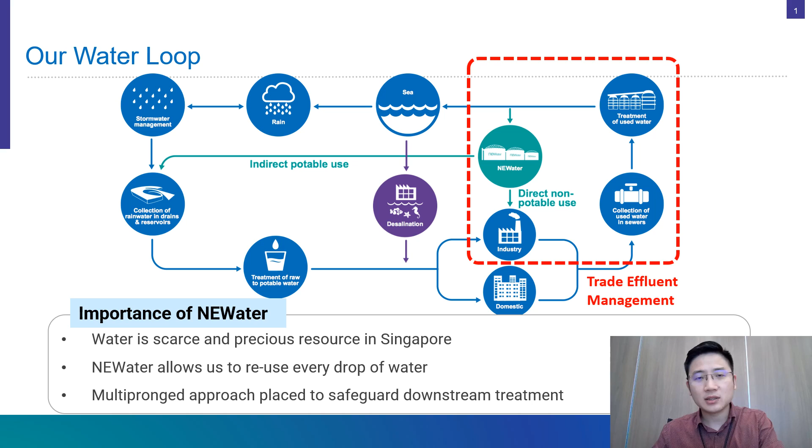Factories are required to comply with trade effluent discharge requirements, as discharge containing prohibited substances or excessive concentration of regulated substances affects the health and safety of our maintenance workers, as well as causing disruption to the downstream treatment processes at our water reclamation plant and NEWater factory.

Currently, for factories with higher risk of discharging prohibited substances or excessive concentration of regulated substances, such as those in the electroplating and chemical manufacturing industries, PUB will require them to install water quality monitoring instruments in their last inspection chambers. PUB officers also inspect these factories frequently to ensure compliance.

During this inspection, trade effluent samples may be collected for lab analysis and enforcement action may be taken if non-compliance is detected. Special operations are sometimes conducted in factories suspected of carrying out illegal discharge activities. During such operations, PUB monitors the trade effluent from the manholes outside these factories.

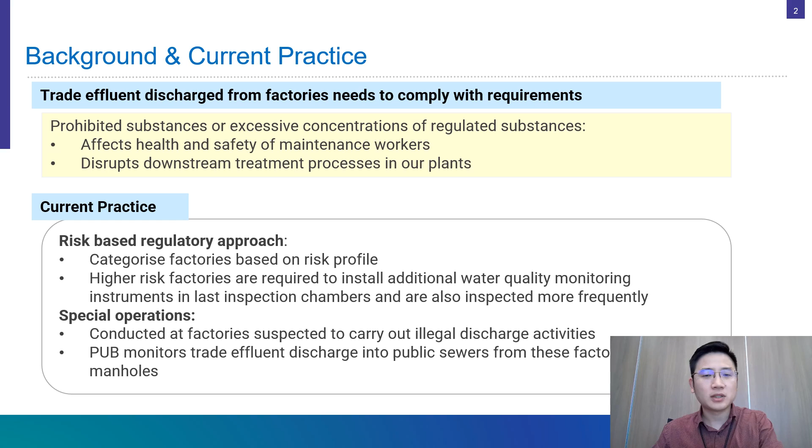PUB has an existing robotic crawler to deploy at public manholes to monitor suspected factories with sanitary drain lines connected to the public sewer system via top-saddle type connections. The crawler comes with a small collection tank with covers to contain the effluent sample. The operator will maneuver it under the sanitary connection of the suspected premises to collect the effluent samples.

For other types of lateral sanitary connections, where trade effluent enters the main sewer in other directions, the current robotic crawler is unable to collect a representative effluent sample, as its collection tank is designed to only collect effluent that is flowing vertically down.

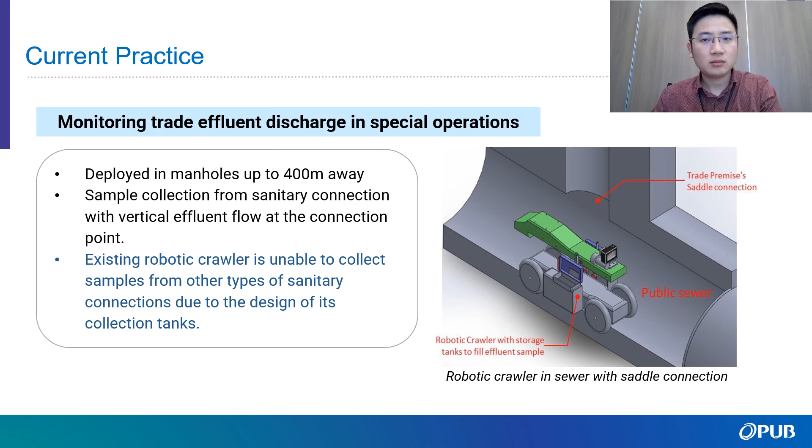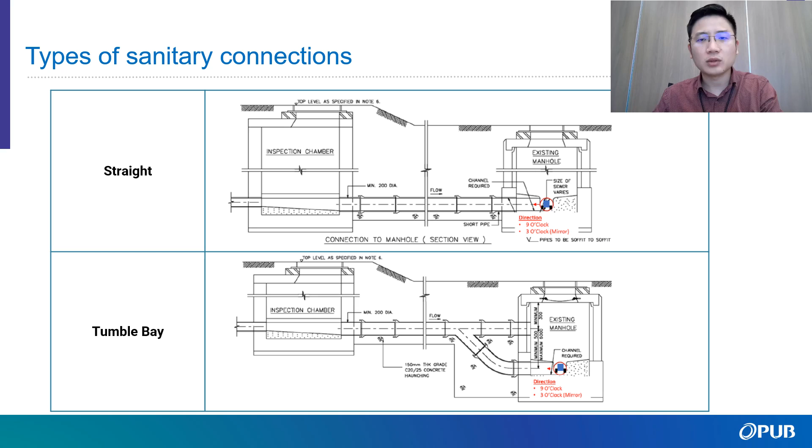This slide shows the different types of sanitary connections. Straight and tumble bay type sanitary connections connect to the main sewer at 3 and 9 o'clock directions, meaning either from the left or the right direction. So the existing crawler is unable to collect samples from these connections due to the design of its collection tanks.

Backdrop type sanitary connection is similar to the straight type connection at 3 or 9 o'clock direction. As for Y junction sanitary connection, it is angled at a 45-degree angle, so the existing robotic crawler is unable to collect representative effluent samples.

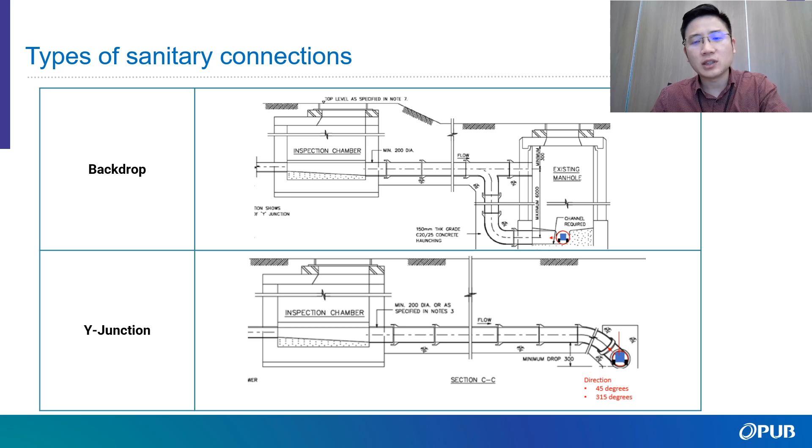The existing crawler can collect samples from saddle and raised connections where effluent is flowing vertically down.

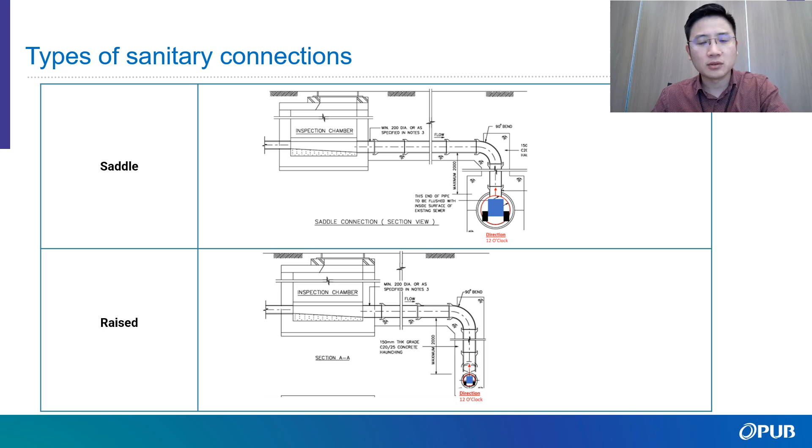We hope to find a robotic system that can be deployed in sewers to monitor and collect trade effluent discharge from the various types of sanitary connections. The robotic system shall be deployed without the need for man entry into sewers and be able to be remotely controlled by operators from the ground.

It should also be able to maneuver in different sewer environments and conditions, such as negotiating bends in the sewer pipes and soft sediments. It should also carry cameras to visually inspect the sewage pipe, sanitary connection, and sample collection process, as well as a gas meter to monitor for hazardous gas at source.

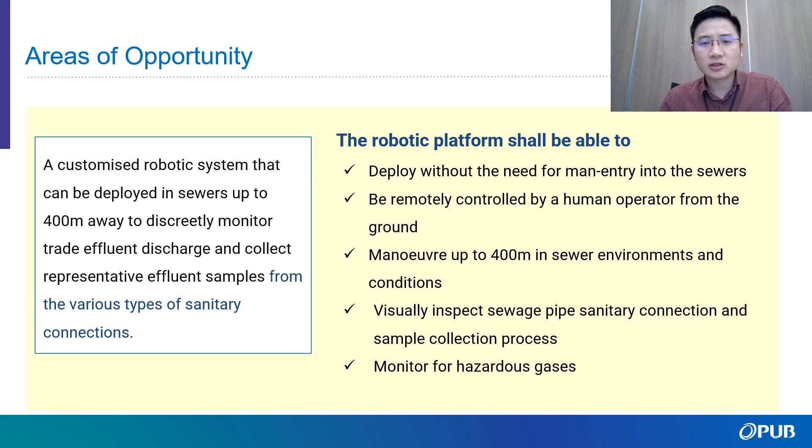The operational requirements of the robotic crawler: it shall have suitable traction to maneuver in sewers with water level up to half bore and pipe invert filled with soft sediments. It should record and display distance traversed with an onboard odometer.

It needs cameras to observe visually and record evidence, and to measure hazardous gas at source, such as volatile organic compound, hydrogen sulfide, carbon monoxide, oxygen, and lower explosive limit. It should also have sufficient cable length and minimization of drag.

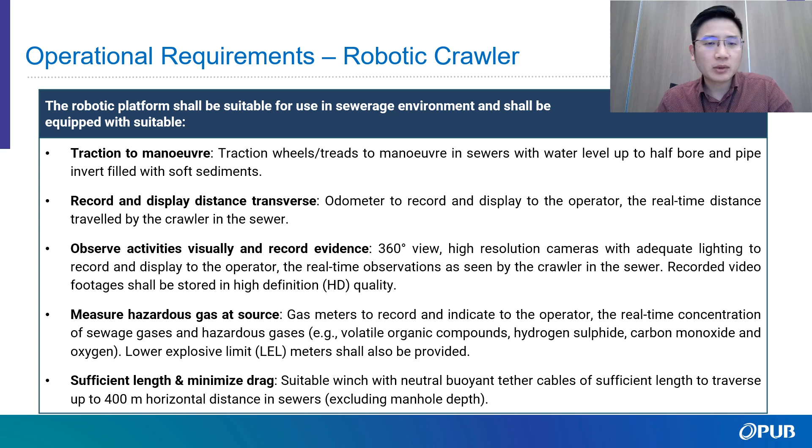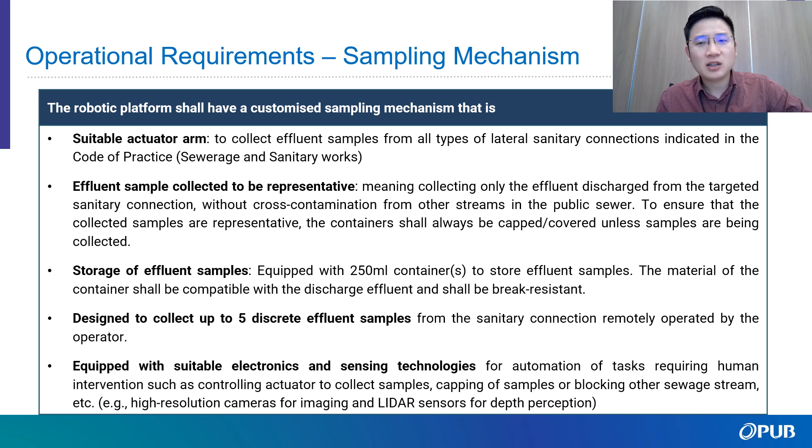That means it cannot be contaminated from other waste streams present in the public sewer, and bottles are kept sealed after collection. The sampling mechanism should be equipped with 250 ml containers to contain the effluent samples, with material compatible with the discharge effluent, and designed to collect up to 5 discrete samples remotely. It should also preferably have suitable electronics and sensing technologies for automation of tasks requiring human intervention.

The robot should be designed for sewers with diameters ranging from 300 to 600 mm and manhole depth of up to 10 meters. Do take note that the standard sewage manhole in Singapore is 600 by 600 mm opening to fit the robot through. Other design requirements for the robot to function in hazardous environments have to comply with relevant standards.

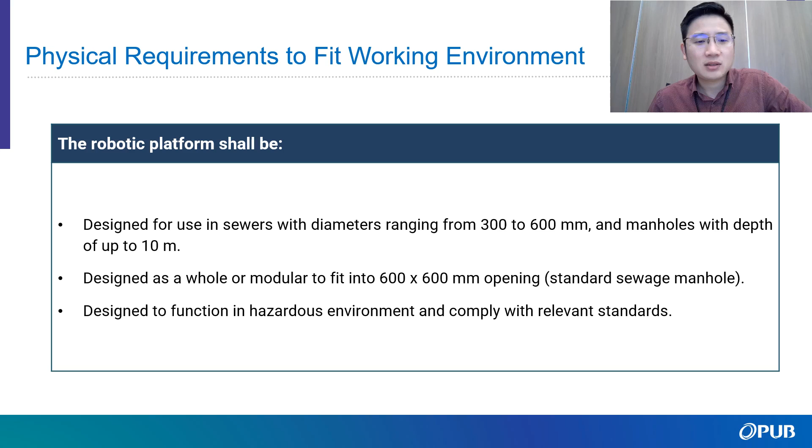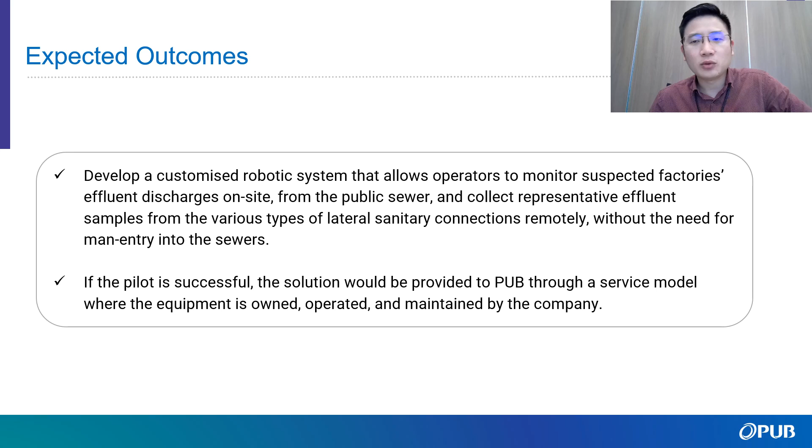We expect the customized robotic system could allow operators to monitor and collect samples of effluent discharge from various types of sanitary connections serving suspected factories, without the need for man entry into sewers. If the pilot is successful, we are looking at a service model where the equipment is owned, operated, and maintained by the company.